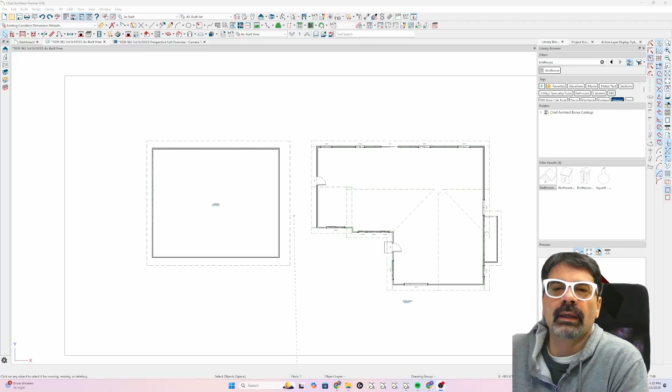I want to show you a quick tip on how to adjust roofs today. I had a client contact me with this question of how to move a roof. This currently is a shed roof on this garage, 16 feet up from the plate. Now, in this case, the floor level of the garage is about 18 inches above the terrain. So this first solution may not be the appropriate solution.

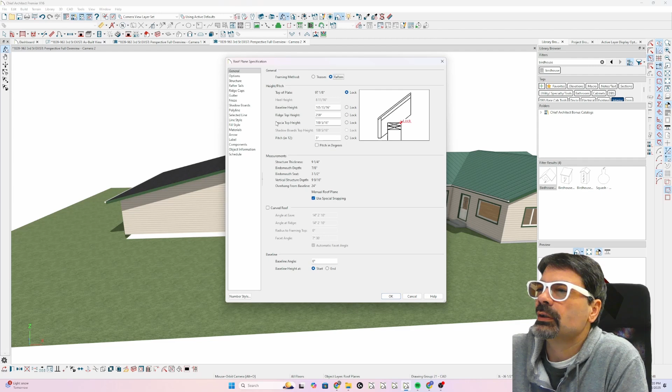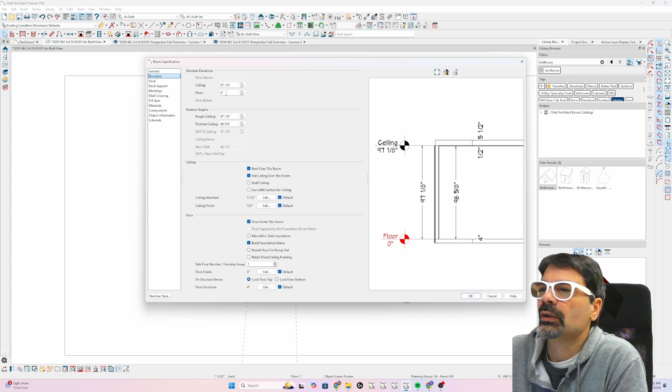And that would be just to take the top plate, 97 1/8 inches. Now that's 97 1/8 from zero. I'm pretty sure that will not take it into account. Let's figure out where that is. Yes, 16. So let's do structure minus 16, open this up, and see this still says 97 1/8. That's from zero, not the height of the garage itself.

Okay, that's from zero. If we go back to our picture here, floor level 0 is the floor level of the house right now. This is 16 inches down. So that's one thing to think about. Had this remained at 0, we could have just used this 97 1/8.

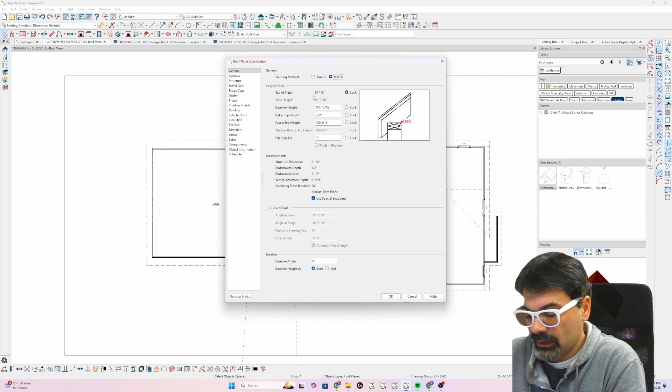What I would do is on my calculator, I don't know why I said calculator. 16 times 12 is 192 inches, minus 97 1/8. So I need to move that 94 7/8 up. So I could lock the pitch and just move my baseline height plus 94 7/8, if that had remained 0. That should do it.

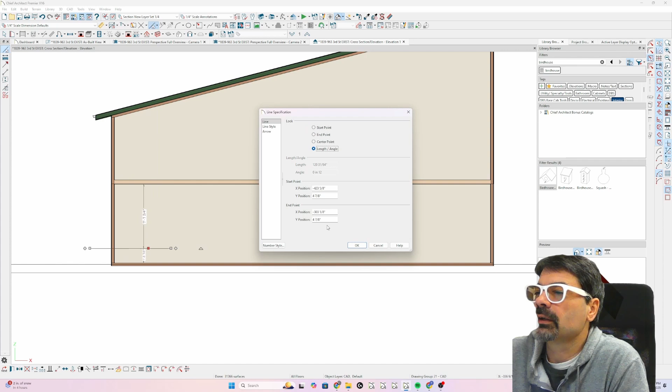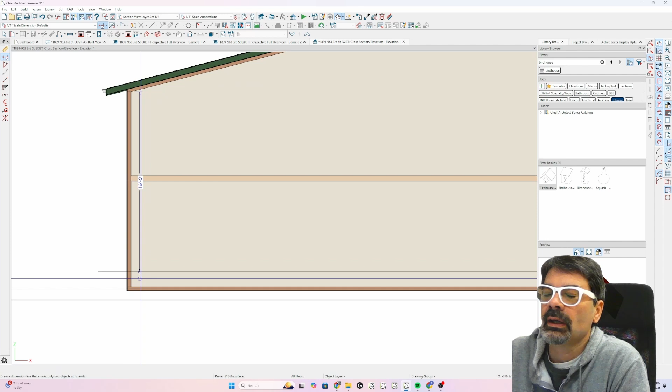I'm going to draw a line here, length angle. I'm going to make that Y position 0. This line is where the house is. So I should have a dimension from here to the line of 16 feet. It went to the ceiling, so let's just do this up here. There we go, 16 feet. Now I need to bring it back down 16 inches because we dropped the floor 16 inches.

So I'm going to click on the roof and open that up. I could lock the pitch and subtract 16 inches, and that would calculate what the baseline height needed to be. You could lock the pitch and bring down the top ridge height, the fascia height, or subtract 16 from the baseline height. You could subtract 16 from any of these three.

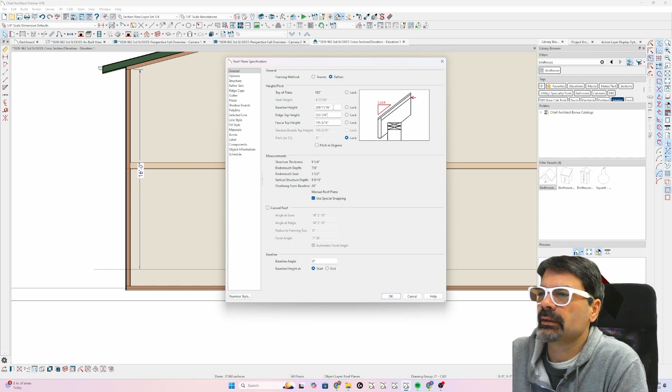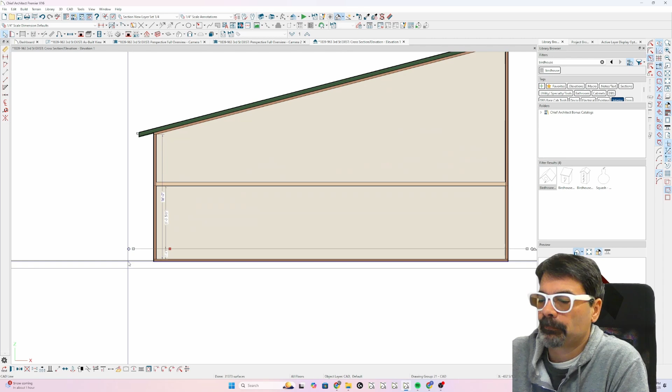Or when you select it, you can also transform, replicate, move just minus 16 like that. Okay, so that's one way of going about it. Now that we've moved it, I'm going to move this down to my floor, and there's my 16 feet. There's probably an easier way to do it.

Let's not save that. Let's change my structure, my rough ceiling, to 16 feet. I'm going to delete this roof plane. Let's go into my roof detail. With a garage this large, I would have to make this a truss, and we'll make our heel height, let's say 12 inches, whatever you want it to be, 3 pitch.

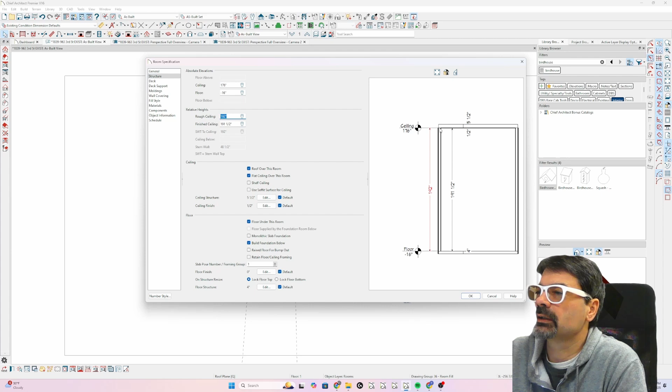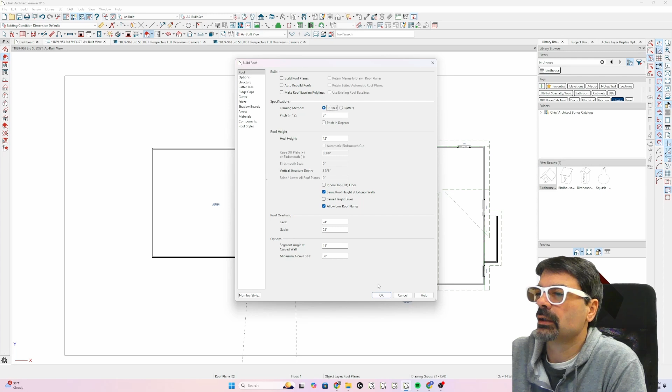But I already did this. 192 inches is my rough ceiling, so that's my plate height right there. From floor to plate is 192 inches. There's my 16 feet. With my roof settings, I've set it to trusses. You could do rafters and go to structure and change your structure to 2x12s, 2x10s or 2x8s, whatever you're doing. But in this case, I'm going to be doing trusses, 3-pitch, 12-inch heel height, and then I would draw the roof.

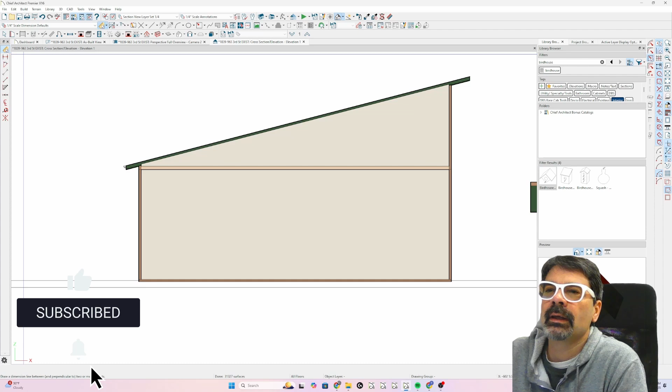I'll draw the roof here. Let's take a quick peek at the camera. There's that. Let's take a quick section and make sure I'm doing this correctly. And I'll show you. So there's the ceiling, 16 feet, and here's the heel height from that plate on up to the sheathing. That's my 12-inch heel height of the truss.

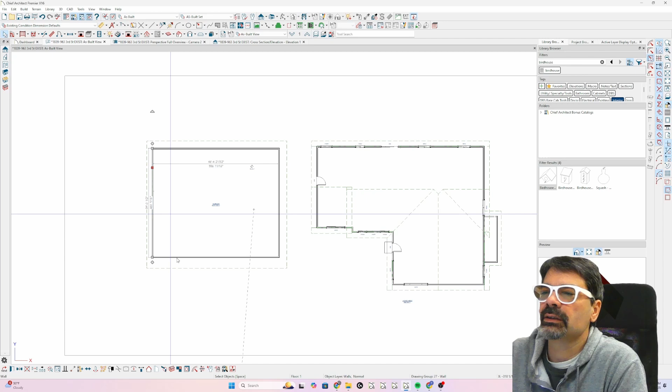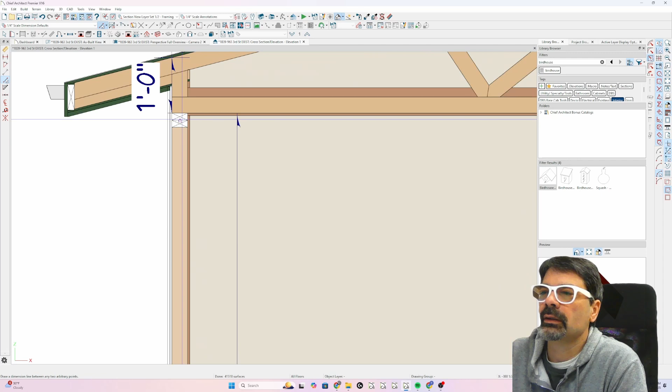So let's create the framing of that wall and the framing of that roof plane and switch to the framing layer here. There you see our truss. There you see our plate at 16 feet, which is what we set in the room. There you see our wall plate and our 12-inch heel height.

A couple ways to get around setting your 16-foot. You can draw the roof plane and move it where you want to, as we did in the first example. You can move it by figuring out how much it needs to move and opening the roof plane, locking the pitch, and then moving the baseline height or ridge top height or fascia top height by that delta.

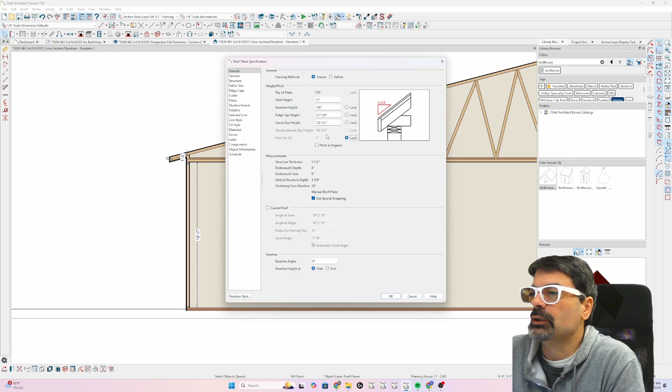You can also just transform replicate and move the Z delta. That moves up or down in the sky. Plus would be up higher, negative would be down closer to the terrain, by whatever delta you determine. Or set the room ceiling height itself and then draw the roof plane.